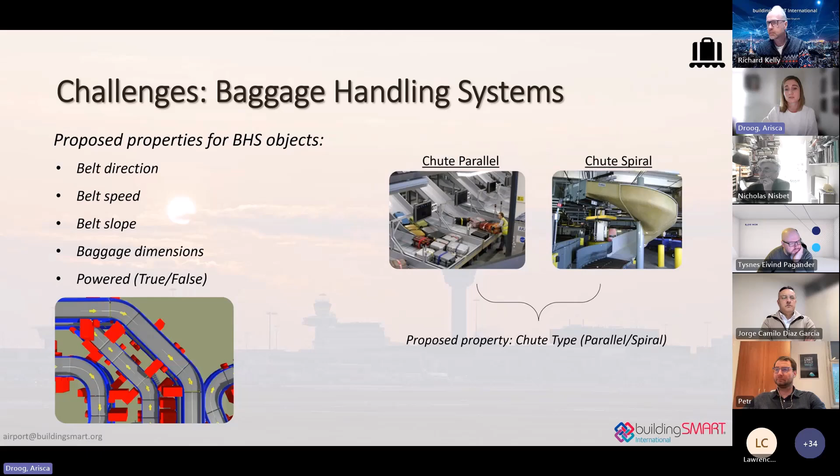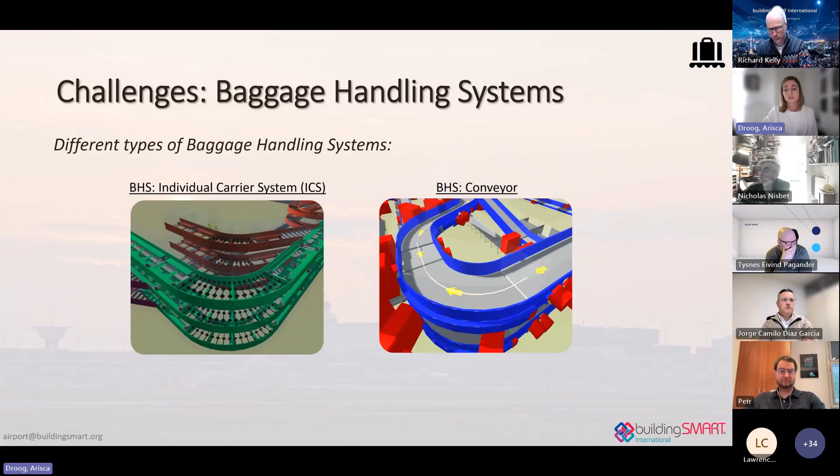Another challenge we ran into based on the results was that there are different types of handling systems, so we have to figure out how to deal with that. And again, objects that are not airport specific, but are very important for airports - a very simple ladder or stairs, a pusher or a stacker. Those are all examples that are not airport specific. So should they be part of the project? Should we exclude them? Should we talk to the other domains to come to a conclusion of how to use these? Those are questions we still need answered moving forward.

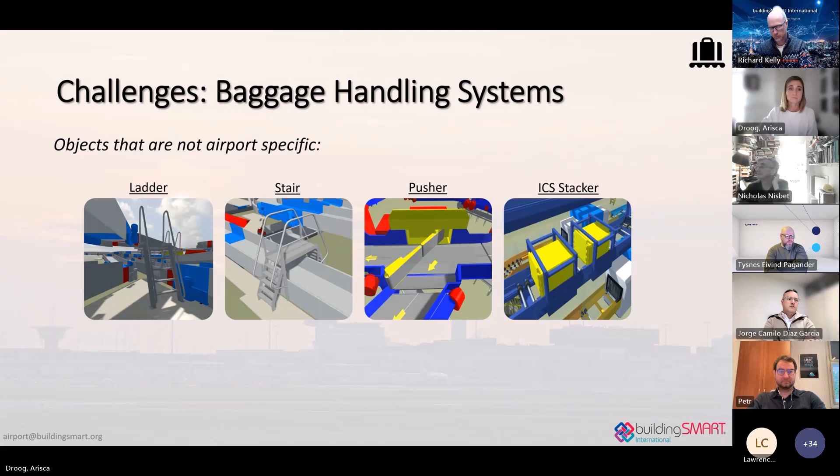If you joined the session in Marrakesh, we also showed how the workflow could be used in practice. I did not include the video because it's Mike Dos Santos's specialty, so he can explain it, but you can rewatch the recordings. Basically, he goes through the whole OpenBIM workflow with some examples from Revit, the buildingSMART data dictionary plugin that NACO created, and we showed how it could be put into practice and made it work. That was very exciting, using the entities project as an example, focusing on baggage handling.

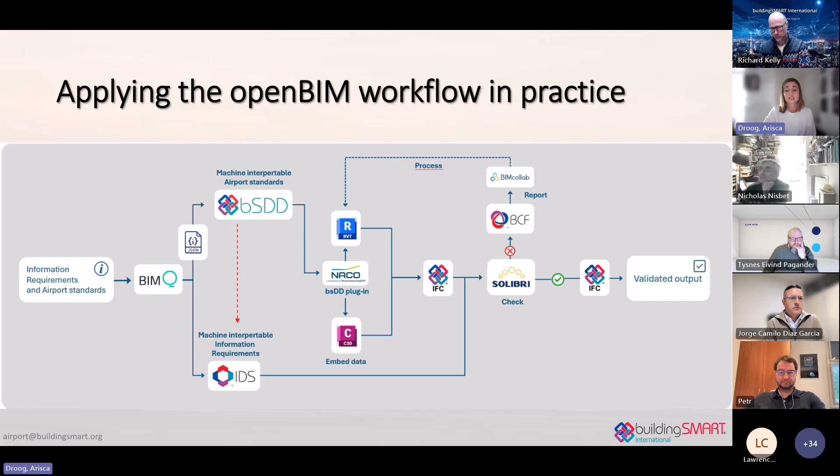So looking ahead, what is next moving forward? We have to finish the other survey results and add this to the buildingSMART data dictionary. We did come to the conclusion that it's taking a long time. Like I said, we started in 2020. I think in 2021 we closed the survey, and ever since we've been going through the survey results.

But a lot of the work that's been done is in kind - so not everyone can always join the sessions to go through the results. Sometimes we discuss different topics. So in order to move a little bit quicker, we decided we just set some ground rules.

If 75% of the working group members are present, we're going to go through the results, and if 75% of this feedback agrees, then we're just going to add it to the buildingSMART data dictionary, and use the request for change option for people to give us feedback, because otherwise we have to recreate another survey based on all the feedback and wait on people to respond, which will just take too long. So we want to add it to the dictionary, make it usable. We showed with the workflow that it can be used in practice, then update or improve the entities through the request for change availability in the buildingSMART data dictionary.

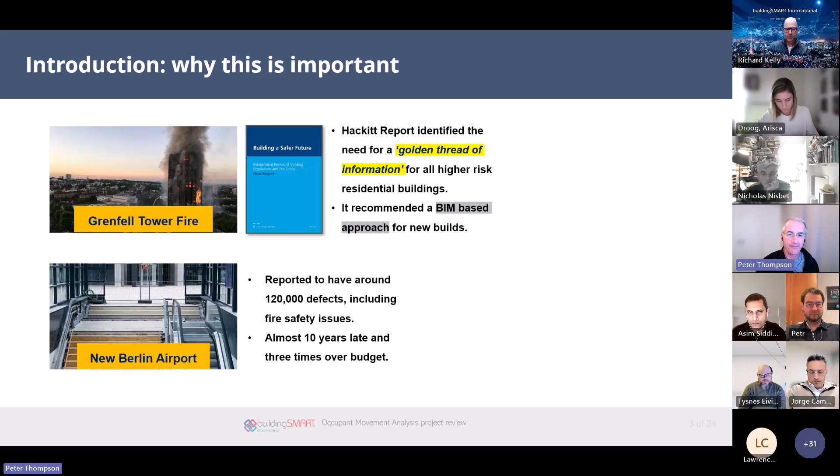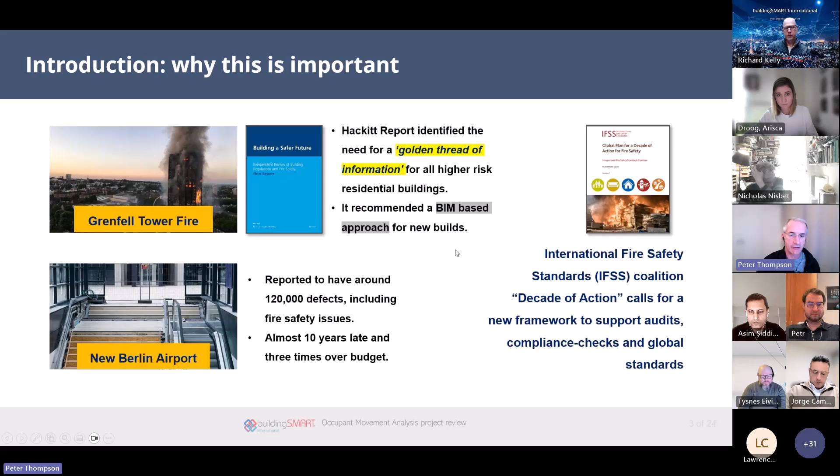And also the International Fire Safety Standards Coalition, a consortium mostly of industry practitioners but also some regulators and other organizations, called for a decade of action to upgrade, modernize, and bring up to date the fire safety engineering profession. Part of that was to develop a new framework to support audits, compliance checks, and global standards and data. So quite a big push from industry, government, and a number of areas really trying to improve fire safety engineering.

That overall scope of fire safety engineering was our big push at the start of the project - fire, smoke, evacuation, egress, circulation, regulatory calculations, all of those things. It's a very wide project area, so ultimately we separated it into two more achievable chunks: the Occupant Movement Analysis project and the complementary fire safety engineering project. It's the Occupant Movement Analysis which we're covering today.

Quick shout out to the team which has been with us for a few years to deliver this project. Asim and Peter at University of Greenwich and myself have been in pretty much every meeting during the course of it, but many others have given up their time too.

Legion, Thunderhead Engineering, UCrowds, Accurate in Germany. Jimmy Abualdenien from Technical University of Munich was the lead in the first phase. Steve Gwynne, Movement Strategies and GHD, John at COWI, Timo, Jarno, and also Enrico as well. So a globally distributed team over a few years contributed towards the project.

So first of all, phase one, the early half of the project which Jimmy led, essentially consisted of working with industry to develop some process maps for workflows and ultimately the first pass of the exchange requirements feeding into the formation of the data. So phase one involved coming up with these process maps.

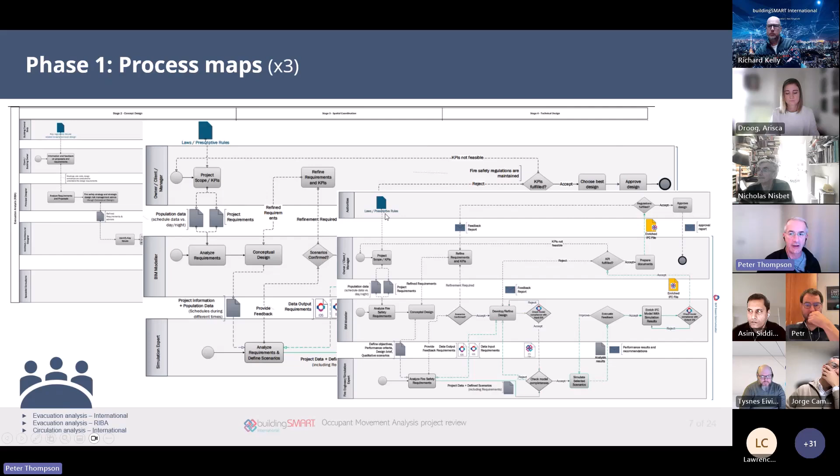These workflows look fairly complicated. They essentially just express personas and what each persona does, looking at the differences - the building blocks, the logic gates, and ultimately getting to the completion of their workflow. We looked at everything from the simulation experts, the modelers, and also architects and BIM modelers in other circumstances. So quite exhaustive processes.

There's just 3 examples, but ultimately we used the process maps working with industry to form these initial lists of parameters as the initial exchange requirements. And at that point, I'm going to hand over to Asim to cover phase 2.

Thanks, Pete. So I'm going to go through some of the key aspects of phase 2. For example, we used the requirements covered in phase 1 and we refined them. And then based on that, we produced IDS files and we used sample models to test them.

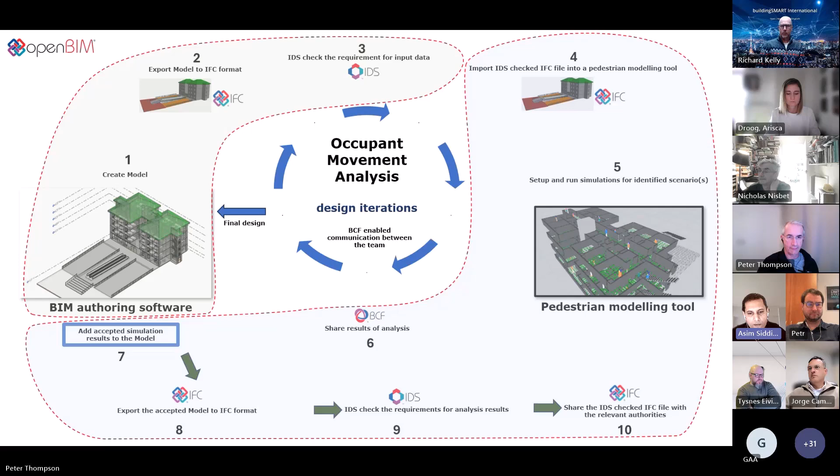Now, I'm not going to cover all the steps because of the time constraint, but I'm going to highlight some of the key points, some of the key things we picked up while working on this workflow.

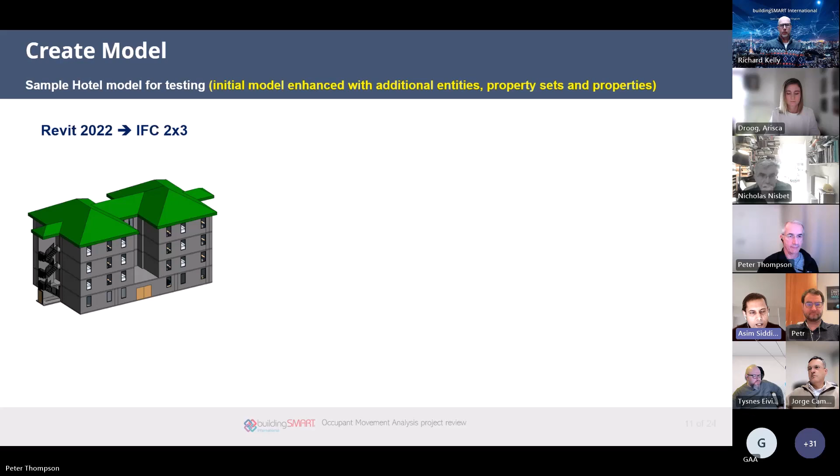For example, we used a sample model created by an MSc student, Nazim Yaku, supervised by Pete. He created this hotel model in Revit 2022 for IFC 2x3, but it didn't have all the entities we needed, not all the property sets and properties, so it was enriched, and Pete worked on it and added new entities and their properties.

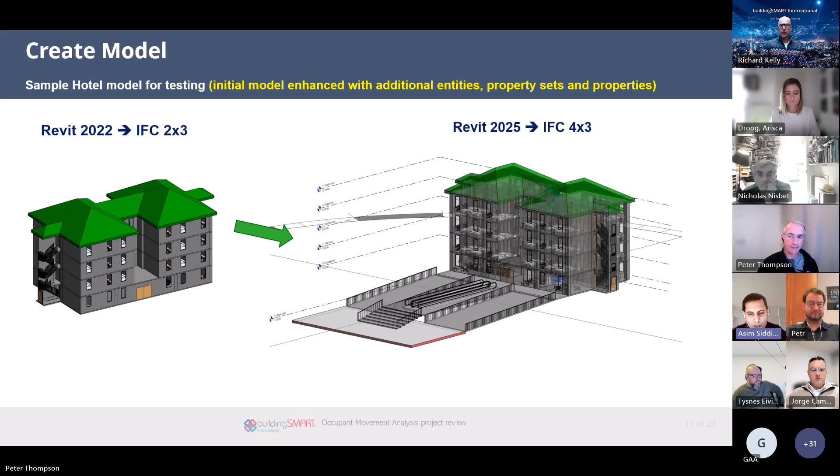For example, we identified properties which are existing in IFC 4x3 and some new ones, and it was developed in Revit 2025 for IFC 4x3.

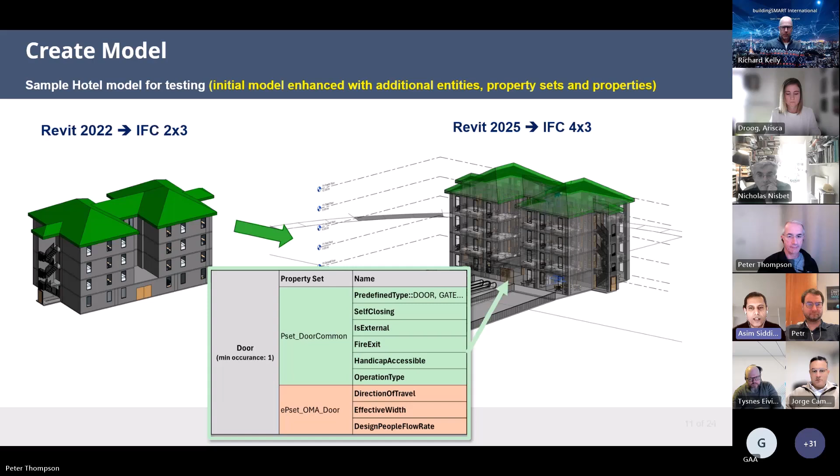Here is one example which I think is quite interesting: using lifts or elevators, because it's the more complicated one and more interesting one to show.

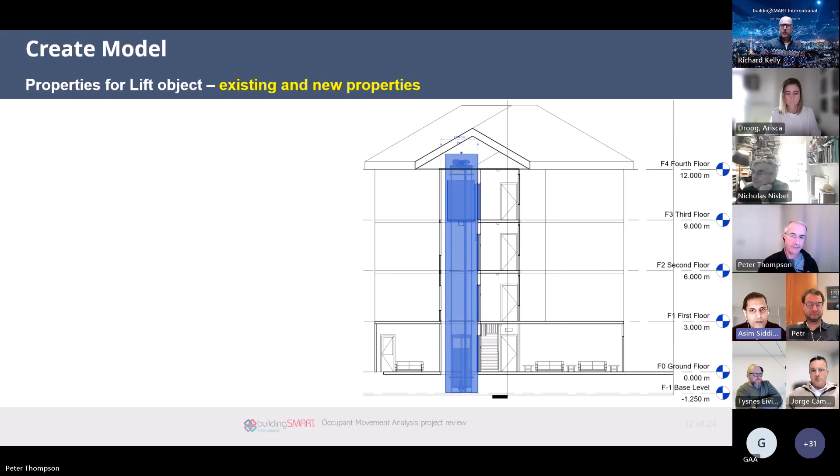For lifts, like doors and other entities, we identified properties which are relevant. We came up with some new properties as well, for example loading area and stories served, which are relevant for movement of people. That's the straightforward thing, but the more complicated part was understanding the spatial connection and how a lift is related to other elements, for example people coming in and moving out from lifts, and how we can understand these relationships.

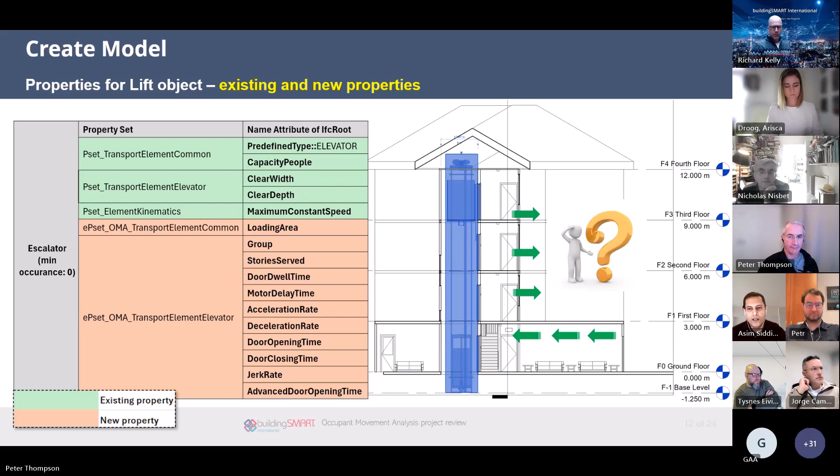There were a number of options available for us to capture this information, for example using IFC zone, IFC spatial zone, and we also have IFC built system, which was introduced in IFC 4x3 to replace IFC building system. In theory, IFC built system comes across as the ideal solution, but we couldn't find any worked examples.

So in the end we used IFC zone. Having some further information about the recommended approach and worked examples could really help in the future.

So once we have the model set up, it was exported into IFC format. I'm not going to go through those details, but I'll highlight some of the things we did for IDS. We created an Excel file, captured all the properties, and then buildingSMART's technical team helped us translate that into an XML IDS file.

It's compatible with IDS 1 and IFC 4x3, and we used the online auditing service provided by BSI to audit this file and check the IDS file structure.

And then after that, we checked this IDS file using a tool.

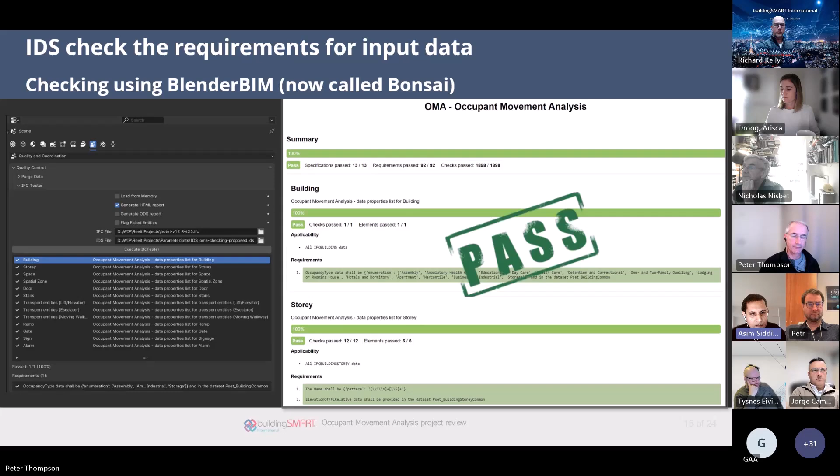We used different tools. Initially we were using BIMWorks, and we tried other tools that support IDS, but in the end we settled for Blender BIM, which is now called Bonsai. It's quite a useful tool to check IFC against an IDS file. It provides an HTML file, and if there are any problems it will highlight them and allow you to fix them. In our case, once we fixed the problem, the model passed the check, so all the properties we included in the IFC file were okay.

These were the three main steps as far as the scope of this project is concerned, but we did other things.

For example, how we can import this information into a pedestrian modeling tool. There are two ways: simple extraction using the elements and their properties, or the other one, which we used in the end, using space boundaries, which allows you to understand the connection between different entities. Again, there are pros and cons, but we went for this approach.

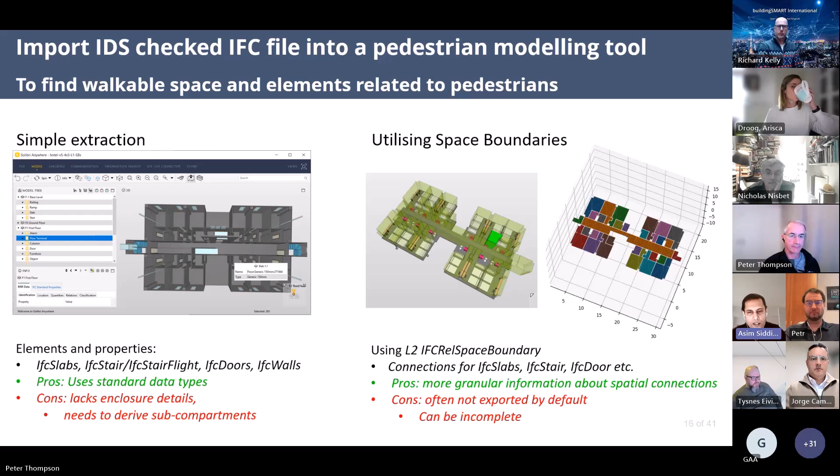So once the data is imported into a pedestrian modeling tool, we can set up population information, scenarios, identified scenarios, and so on, run simulation and export data.

For example, data was exported in JSON format, but there are other formats. The idea was you can share this information with stakeholders, understand whether they are okay with the results, and so on. Once it's finalized, we can capture summary information.

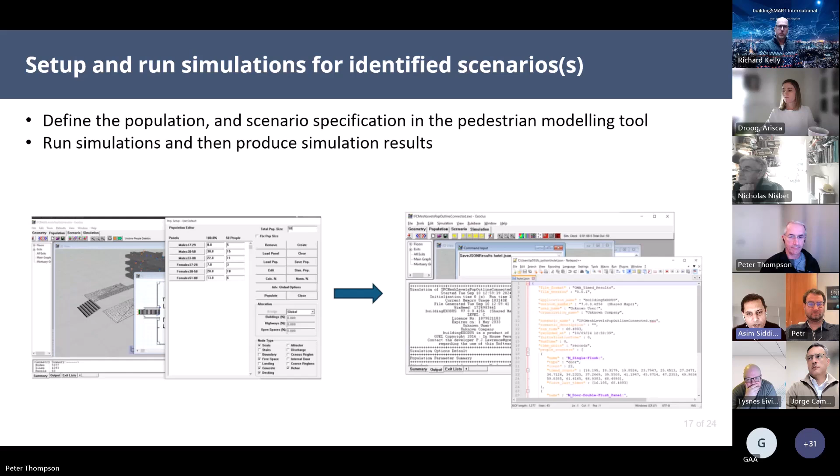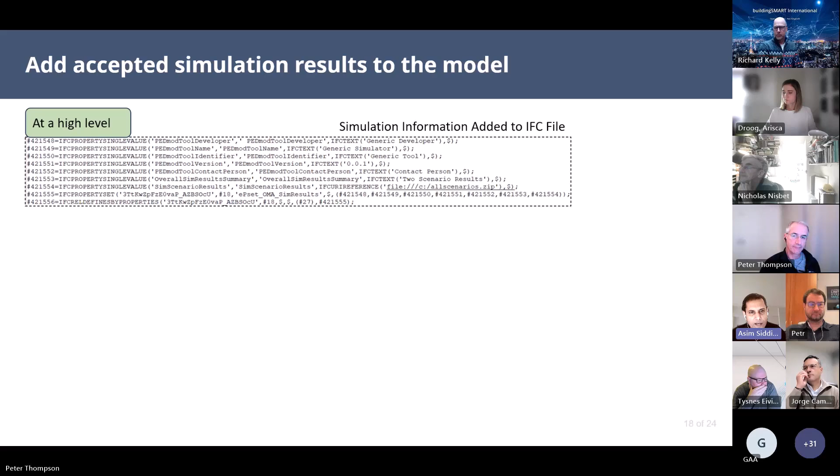To capture this summary information, we identified some properties, a new property set which we attached to the IFC project. For example, the key summary information linked to external files. We wanted a more sophisticated solution, and we wanted to use lists, but even though these things are supported in the IFC schema, in terms of implementation we found several limitations.

So we went for a very simple solution in the end, just including a link to an external file, which contains all the other files, a zip file containing links to other files. But the idea was we have a list of files containing information about each scenario.

So depending on the support from different software tools, it can be made more sophisticated.

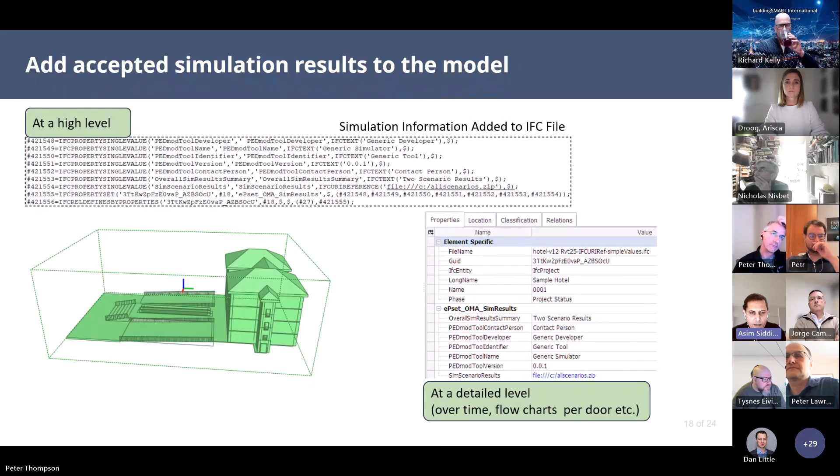So that was a very quick overview of phase 2. Now Peter is going to talk about the submission, and he'll highlight some of the issues and challenges we face. Thanks. Okay, so I'm just going to go over the closure of this presentation.

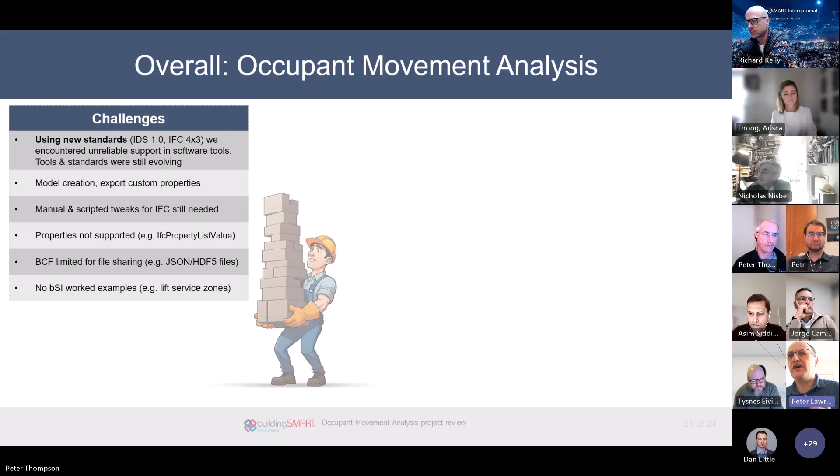So the key highlights from that project are we achieved a full open BIM design digital work loop, and we have 100 new properties associated with that. This covers everything from setting up your model to running your simulations and capturing that data, because we wanted to do, as the Hackitt report recommended, capture information that was lost.

We've worked on many fire safety projects, and often the case is that information has been lost. If you want to later go back and find that information, it's difficult to locate or find the correct information at the time.

The expert panel, we must thank them for giving guidance and in-kind help. We had academic and industrial partners all working as a team, which is a great mix of people to work on a project, all giving their time in kind, which demonstrates how important this work is, because people are willing to give up their time to complete this, as it's an important aspect related to fire safety and occupant movement analysis. We also like to thank the bSI committee for their help, especially Richard, Jon, Léon and Mirbek, and the Building Domain Steering Committee, the bSI technical team, and others who helped along the way.

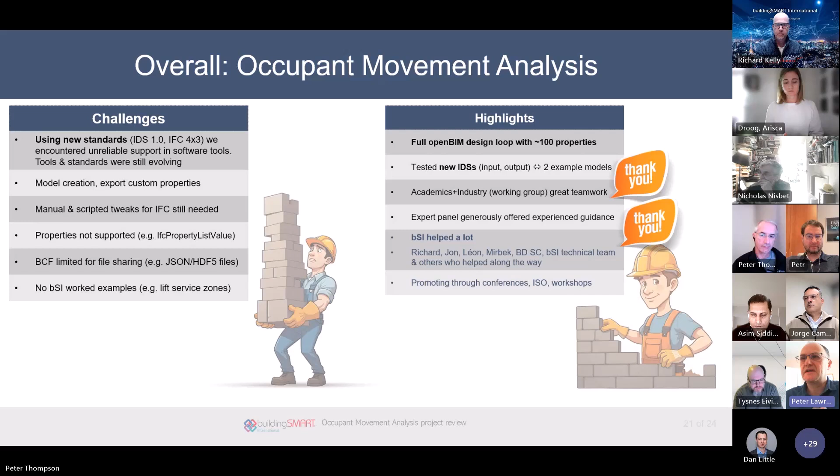Following on from this work, we're also promoting it through conferences, both academic and industrial, and professional conferences. We put the information forward for the ISO committees, for the fire and behaviour standards, and we're also promoting through workshops, which we go around and present at various industry companies.

Very quickly, as we just said, I've already covered the occupant movement analysis and we published a report. The next follow-on project is moving on to the fire safety engineering IDS, where we've submitted a draft initial activity proposal, which we're now awaiting approval from the Building Domain Steering Committee, and we're waiting for the go-ahead for that. And we plan to...

Complete follow-on projects, because occupant movement and fire safety are not restricted to just buildings. We've got interest in infrastructure because we look at large circulation spaces like Olympic parks, or in our case, evacuation scenarios from regions within towns and cities. We do simulations on ships and airplanes, so we're looking at maritime and airport domains, and also railway domains, because evacuation from and fire safety on railway carriages are very important. We're already looking for further partners for the infrastructure project.

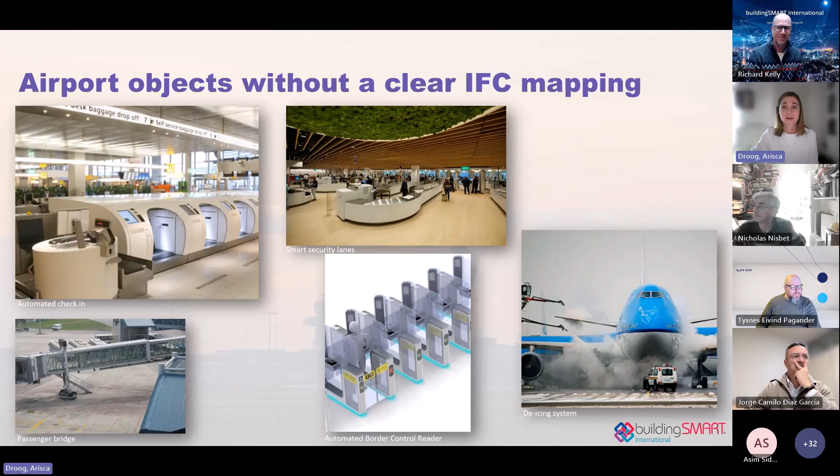You guys just heard an update, but you know the airport objects without a clear IFC mapping that we are currently working on. To give a short summary, basically the next steps are to enhance the understanding of airport entities by adding better descriptions and if possible photos to each entity within the airport domain.

We still want users to be involved and engaged so they can give feedback through the request for change function in the buildingSMART data dictionary. That way we don't have to create new surveys or avoid the discussions that might come from it, causing a lot of time, so we want to make progress. The outcome will streamline the process of integrating airport entities into the buildingSMART data dictionaries and being able to use that workflow to start using it in practice.

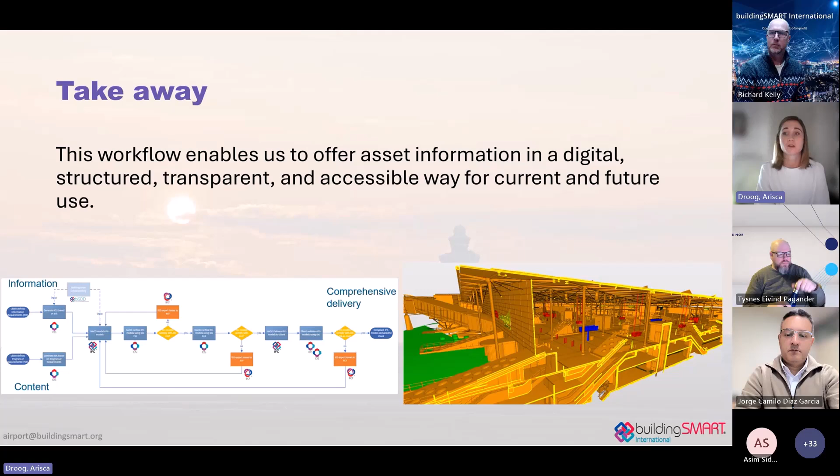Looking ahead, we had a closed session in Marrakesh to see how we can keep people motivated and get more people involved. So we agreed that we are going to be looking at different use cases anywhere within the asset lifecycle.

So we want to create a use case, define what the primary goal or problem is, the solution that is intended to address that particular problem, what stakeholders or end users are involved, what is their role within the process, what specific tasks or actions need to be performed to achieve their objectives, and describe key success criteria or outcomes that would indicate whether the use case is successful or not.

And the last one should actually be the first one, but for each use case, we want to map it within the lifecycle where that use case is applicable. We came up with the idea of creating bracelets and collecting different charms that represent those use cases to make it more alive for people. They can recognize it and hopefully help us work on those use cases and promote the usage of OpenBIM within the aviation community.

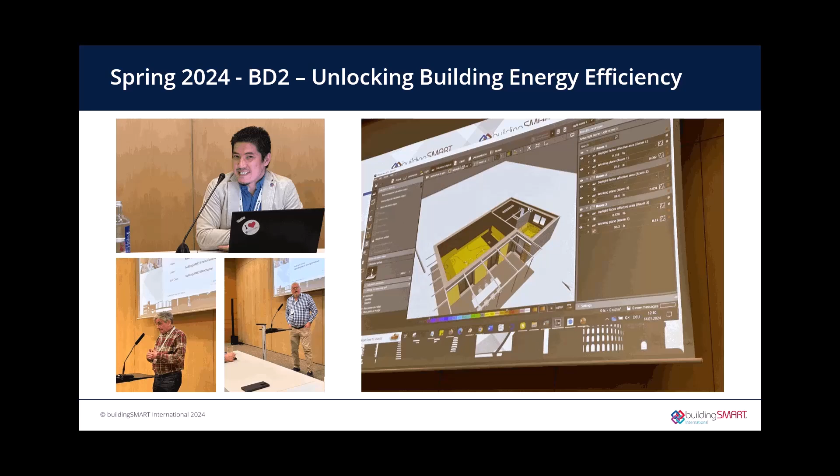So we're looking to bring more of those to the future when we go to Singapore and then Berlin. We're looking to have more of these types of sessions in both of those venues.

The other thing we've been doing, instead of quarterly, we've pretty much been doing it at our town halls. We did one outside of the summit structure, but basically bringing in the town hall thing, getting people online, getting people interested in what's going on in the building domain, trying to solicit feedback, which we've been able to bring into the steering committees to actually have a look at what might be upcoming projects from other chapters and so on and so forth. So we're pretty much doing a town hall as part of our last session at the conference at each summit. Those are particularly helpful.

And with that, I don't want to spend a lot of time on it, but I wanted to give you a flavor of it. I'll hand it off to Rob now to talk about the use case management tool.

As Dave has introduced our projects, I'll take a moment to explain how we're looking to share them using the use case management tool, or UCM. Let me share my screen with you. The use case management platform lets us document and share best practices in a way that's accessible for the whole industry.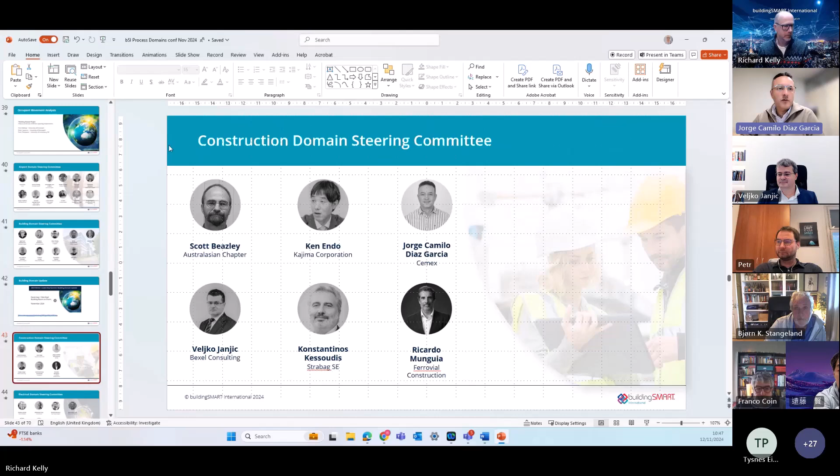Yes, I will explain, but we have the full crowd of the committee. There is Ken also from Kajima. There is also Konstantinos from Strabag, Veljko from Bexel, and Ricardo from Ferrovial. I think they are all together also in the meeting.

Okay, let me just share my screen. Just let me know if you can see the screen. We can see it, that's fine. Thank you.

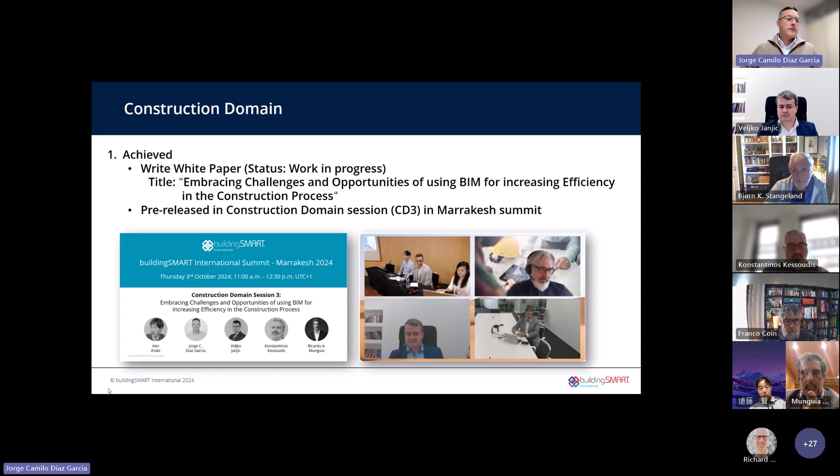Additionally, what's happening? As I mentioned, we have been growing, having changes in the steering committee from people with experience and also newcomers. This time we are very happy to have Scott Beazley from the Australasian chapter, which gives us a quite interesting geographical scope. Ken is part of the Japanese chapter, and having this Australasian chapter will give us also more participation from this part of the world, and will help us have better projects and advance in our next endeavors.

The plans that we have currently are tied to the next Singapore summit. We're working on planning and organizing the sessions, taking advantage of our presence now within the team in this part of the world, and trying to encourage the Asian chapters and let them know that we have a lot to offer, overall from the buildingSMART Summit, and of course from the construction domain also.

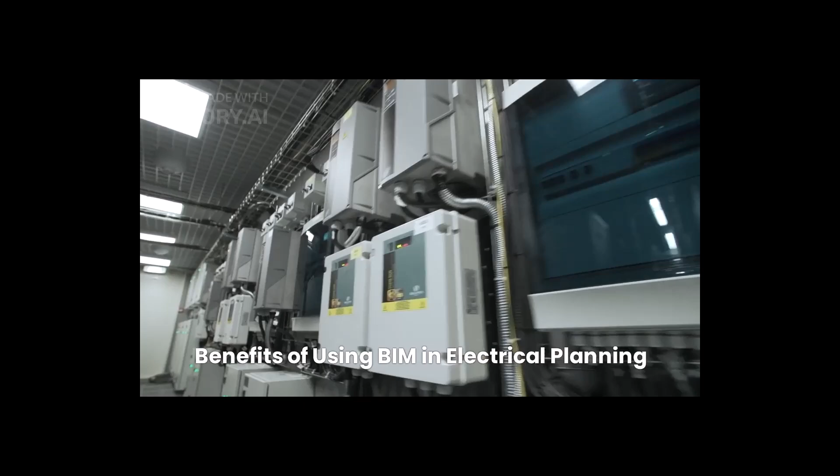In our domain we work to support all aspects of electrical planning, including load calculation, where BIM can be used to calculate the electrical load of a building, taking into account the different types of equipment and appliances that will be used. As well as system design, where BIM can be used to design the electrical system, including the sizing and placement of electrical panels, distribution boards, and circuits.

And think about material and cost estimation, where BIM technology allows for precise material and cost estimation for electrical systems by utilizing the 3D model and project data. This enables project managers to plan and budget more efficiently.

Not to forget the coordination, where BIM can be used to coordinate the work of different trades, such as electricians, plumbers, and heating, ventilation, air conditioning contractors. This shows that the use of BIM in electrical design and engineering projects has revolutionized how projects are managed and executed.

With open standards and tools, the electrical domain at buildingSMART International is driving innovation, ensuring that the buildings of tomorrow are sustainable, efficient, and adaptable.

The advantages of implementing BIM in electrical projects significantly surpass the challenges, offering organizations substantial improvements in project outcomes, such as lower costs, enhanced quality, and greater stakeholder satisfaction. As technology advances, the adoption of BIM is expected to grow, solidifying its role as an indispensable tool in the electrical design and engineering industry.

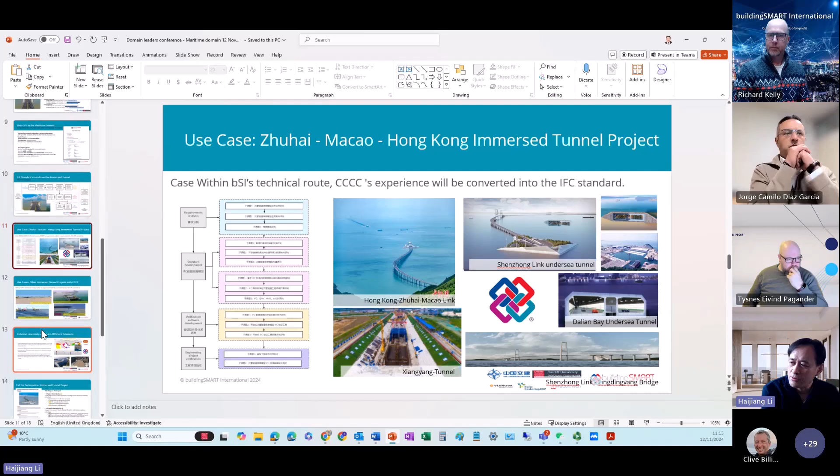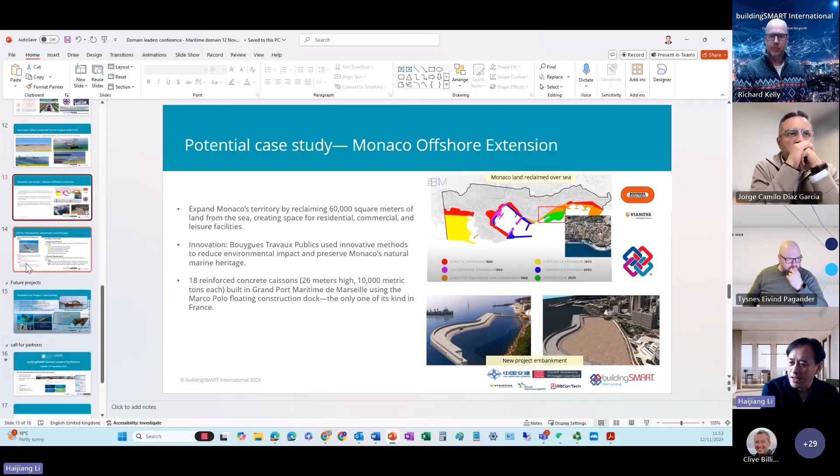With all our working partners, these are the working packages. Currently, we are focusing on three use cases: the Zhuhai, Macau, Hong Kong Immersed Tunnel, another Immerse Tunnel project, and the Monaco offshore extension. And of course, we are calling for more participation.

The next one is a potential next project, sea farming. These are the briefings for that project, and we are currently working on finding more potential partners.

We keep on trying to talk to Syntec, as you can see here. These are the brief intro and links. And we're also talking to Subsea.

Last week their CEO visited Cardiff University. We're talking to them according to their requirements and potential interests. We're also talking to the Portugal chapter, and there's a company, Mota in Portugal, that could potentially be our partner.

We also reached out to more universities: TU Munich, UCL, Tongji University, and Dalian University of Technology. Hopefully by the Singapore Summit, these new partners could attend and present their work.

Okay, back to Richard. That is everything from the Maritime Domain.

That was very succinct, thank you Haijiang. Yes, some really good work done in that domain—a really good charter, a really good roadmap, and a good start to the draft project plan for the Immersed Tunnel. We look forward to working with the team and the expanding team on delivering that, and indeed the rest of the items on the roadmap.

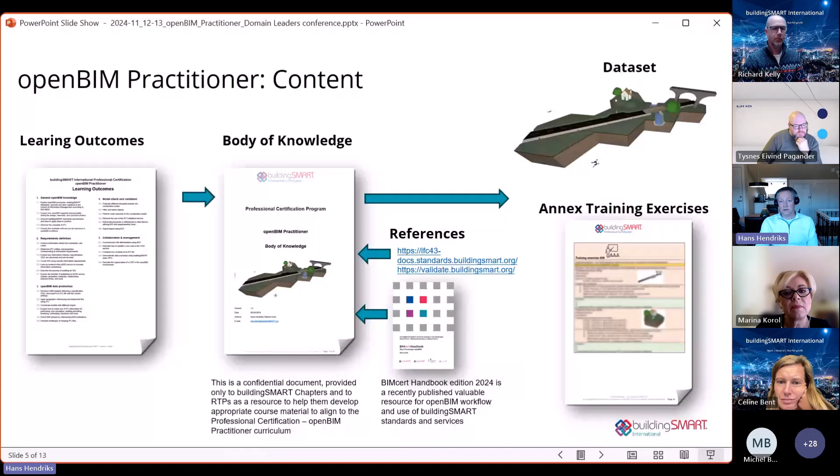The content in the learning outcomes, I will not mention all the topics, but they are structured in 5 modules: more general OpenBIM knowledge, then requirements definition, OpenBIM data production, then model check and validation, and then in the end, communication, collaboration, and management. So it's a kind of workflow, as many of you will recognize in daily practice as well.

The OpenBIM dataset was developed with the idea to have a cartoonish-wise dataset that can be used in training as well. We have a variant, an alternative for the exam. And the OpenBIM principles are there, so they can choose the software that they want to use. It's universal. We noticed also that people liked that. We had already a lot of reviewers, but they liked that they gain knowledge from other domains. It is used for practical tasks and questions, and performance-wise it's not so heavy, so it's doable.

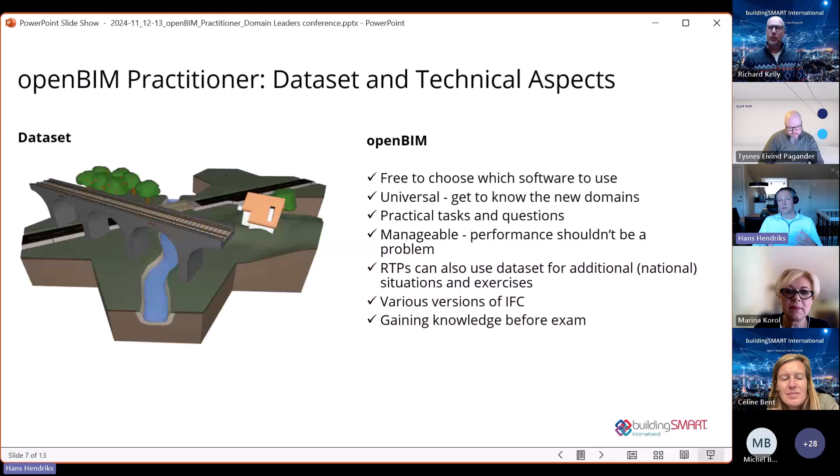And as I said, the registered training providers can use and build on top of this with new ideas, new tasks, new questions, etc. So a little bit more in detail, it's built up with discipline models.

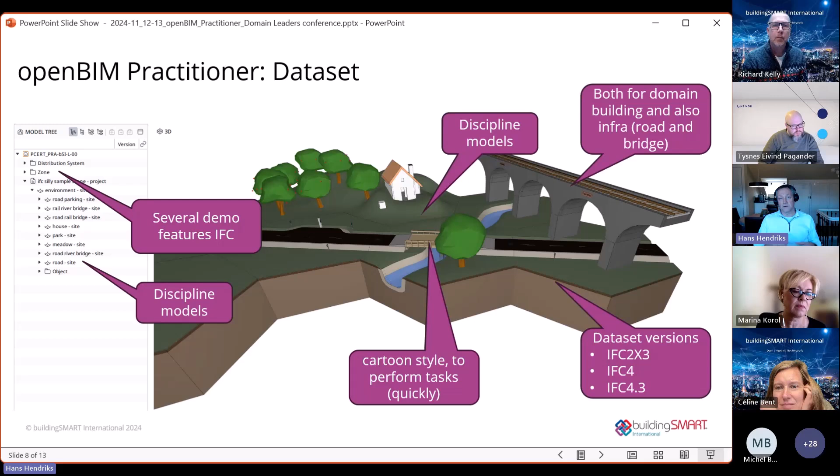There are several versions available, from 2x3 until 4.3, and there are also a lot of features inside it. So to explain zones, for example, or what's in the IFC system - it's built up with tiles, as we call them. Tiles for the building domain, but also for the infra domain. And the idea is that we could later build on top of that more tiles and more examples.

To emphasize again, like Marina said already, it's both a training and a certification program for practitioners. And as Marina also said, it's meant to train all the new standards. As I see already today in this meeting, there are a lot of new developments to train in a universal way to use these standards and services of buildingSMART.

Training exercises - to give you an impression, this is a training exercise. They have to federate models, but also do a quantity takeoff: how many columns, how many beams, etc. Another training exercise is more about filtering and also reporting topics to BCF file format. This can be used during the training. In the exam, there are similar tasks as well.

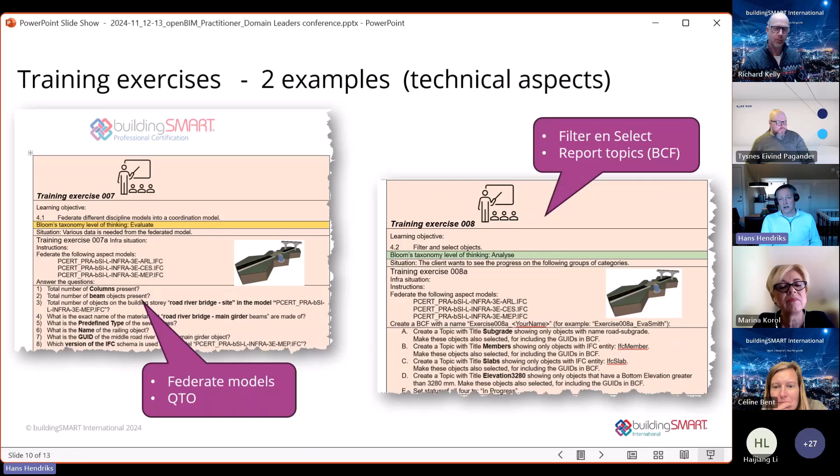The exam consists of questions and tasks at different levels - some are just knowledge-based, but also analyze and evaluate in the Bloom taxonomy. The core content of the international exam will take 2 hours, and it's on the qualification platform on Moodle.

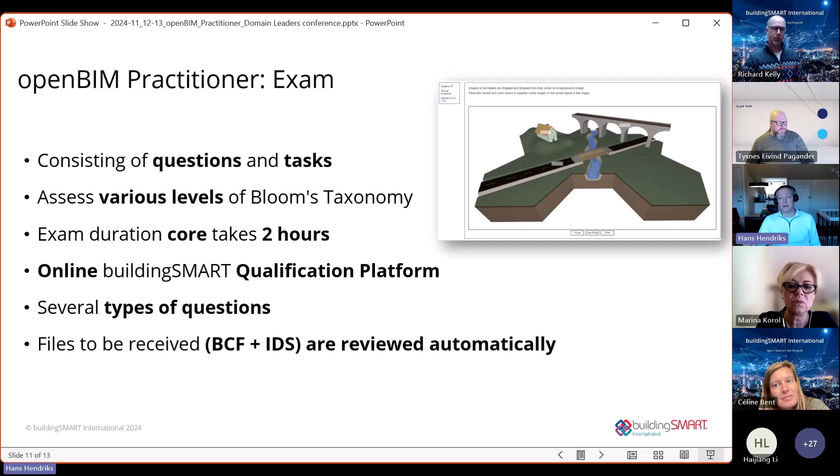And the types we are using are different types of questions - multiple choice questions, but most of the questions, as you see here, you have to drag and drop something, or send in something, upload stuff as well. And we are working now with the technical team so that if candidates publish BCF files and IDS files, they are reviewed automatically.

Just to give you a glimpse, this is also the last slide about the examination. It's on the Moodle platform, slightly the same as in the foundation, but now with 2 hours for the core content. But the most important thing is they have to download and upload files - for example, download files to see how much misalignment there is between the discipline models, or upload an IDS file or a BCF file. And they can see how much time they have in 2 hours total. So this is a glimpse of the exam itself.